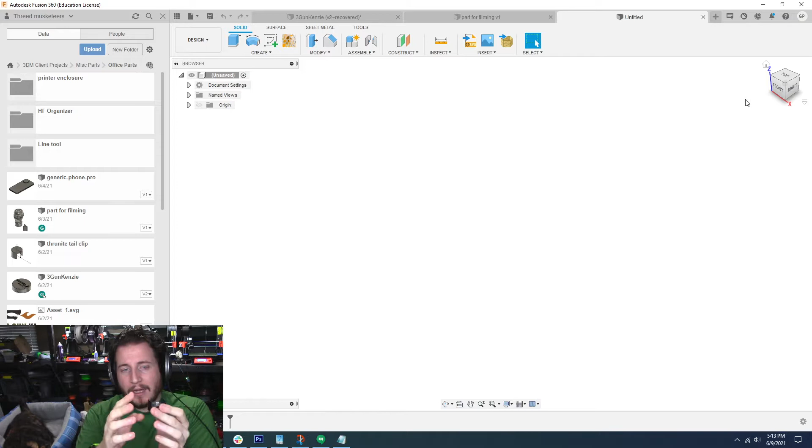All right, we're in Fusion. As always, we're gonna start. This piece is gonna be better from the top because I'm gonna extrude straight up. And what we're gonna do is we're going to create a piece that this can slide into, okay? So it's going to have to grab it down at the bottom and then reasonably follow this contour. So as it goes in, it can really only go in one way. And then we will be able to screw it into a 1/4-20 thread mount.

1/4-20, that's 1/4 inch, 20 threads per inch. There you go. We're gonna try out two different methods for this. I'm gonna actually create threads in this part. I don't know if that's how we're gonna end up doing it because of course plastic threads are nowhere near as strong as metal threads. So we may end up going to a heat set threaded insert, but that'll be a channel video if and when that does happen. So let's start with it.

Let's grab our sketch. Let's scroll to the top. Let's get our diameter. We're going to measure it. So we talked about draft in that last video. You guys can see the draft on that. You see the angle? That's draft. And so when you want to measure something with a draft on it, you got to get all the way to that outer edge.

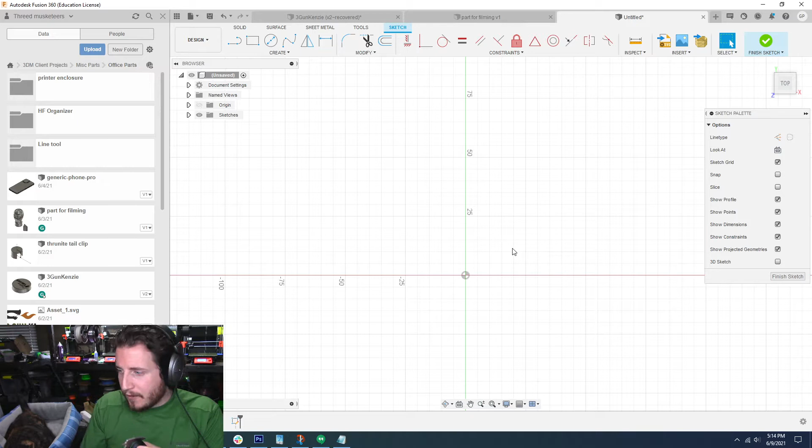39.5. We're going to call it 39.5. I'm going to up it to 39.75 to give us just a little bit of room. And I'm going to show you what I'm going to do. I'm going to make the walls relatively thin and add a little detent. So let's go ahead and get our design on there.

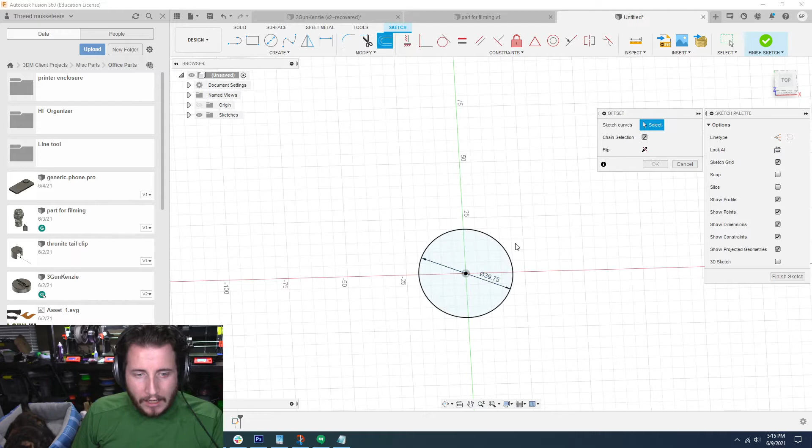39.75. That is the base. So this is the base of our unit. We want to have it be a little bit bigger than that. So to do that, we hit O for offset. So I'm going to go 2.5 millimeters on that. Gives us a good base there.

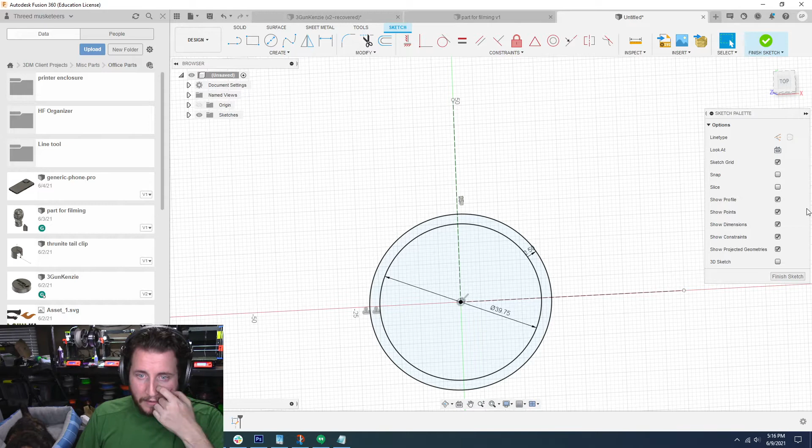And so I want to add some lines. But to do that, we need to first do the lines that we always want, which is L and X, our construction lines, to come up. Get it way out of the way, hit escape, hit the L key again. Go out to there, randomly hit X, hit escape, and that way you are no longer in your construction.

We want to create something so it slides and clips in. There are a few different ways we can do it. But the way I'm thinking, I want to do a line from there. I don't know, man, maybe there. And we're going to end up mirroring it, so let's look at doing some lines here. So I want this to be, let's grab a dimension. We're going to grab that to the center point there, because we want to know, are you not going to give me an angle? Seriously? All right, fine. We'll do it from here to this top.

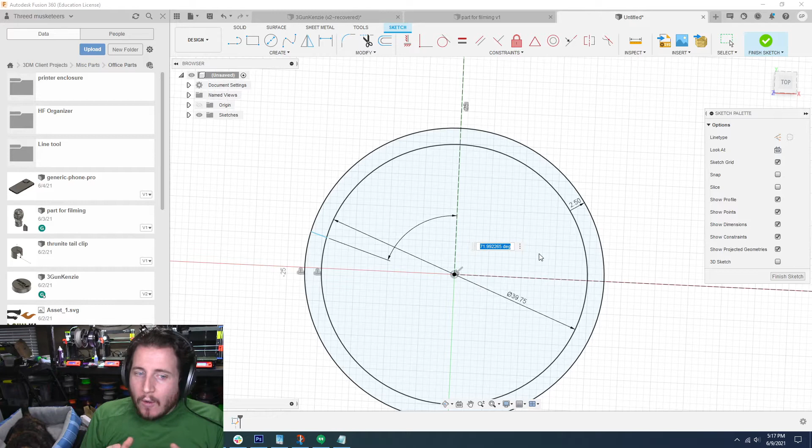Okay, so at 90 degrees, that would be a perfect half moon, but we want to go a little bit further. That way it'll lock in when we put it inside. We don't want to go too much. Okay, so if we go to 90, you don't let me change that? Oh, no, it won't, because it thinks that it is over constrained, so we got to redo that constraint. That is 90. I want to make it 70. And that's going to really force you to push it in. That might actually be a little bit too much. Let's do 75. That should be good. That should be a C that really grabs it in.

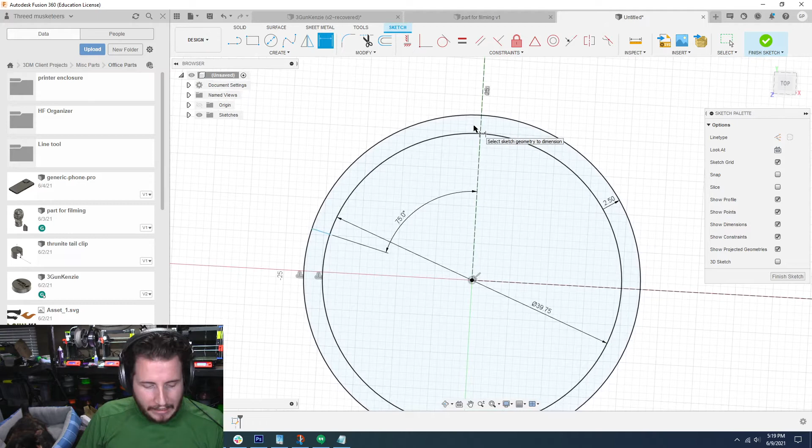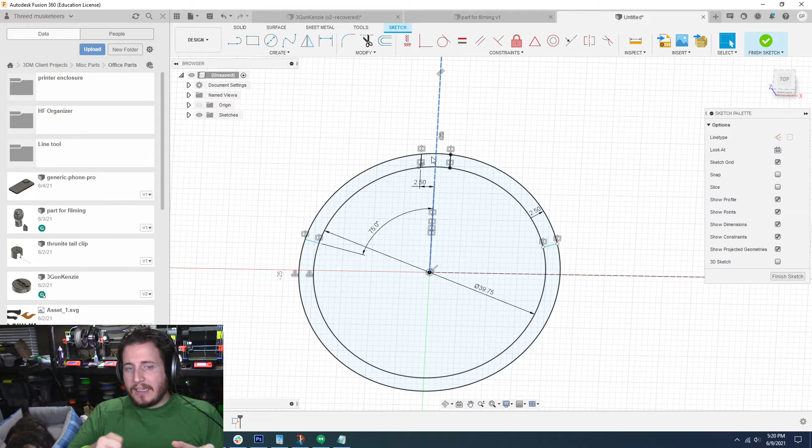On this side here, we're going to do a couple of lines. So let me grab my line tool. I'm going to come straight down. That should be okay. We're going to go with a mirror here and here. Mirror line is that. We're going to click OK. And the reason we're doing this is I want to create a little nib, so that when you slide everything in, it kind of locks in place on the backside as well. So you have to bend it out and then you can slide it.

All right, let's first get ourselves a good looking base here, because as Meghan Trainor says, we are all about that base. I'll just do everything with a factor of 2.5. Actually, I don't know if we want to do that.

So we have to design it for the fact that we're going to have a heat set threaded insert in there. These are those inserts. Now, those inserts are 6 millimeters in diameter and 8 millimeters in length. Okay, 6 millimeters tall, 8 millimeters OD. Now, here's the deal. Threaded inserts can be a real pain in the ass, but that does mean that this needs to be at least 6 millimeters deep and likely should be probably 8.5. So, oops, went the wrong way. Minus 8.5. Gonna bring that sketch back because that sketch matters. I gotta go back into the sketch and make a few other changes.

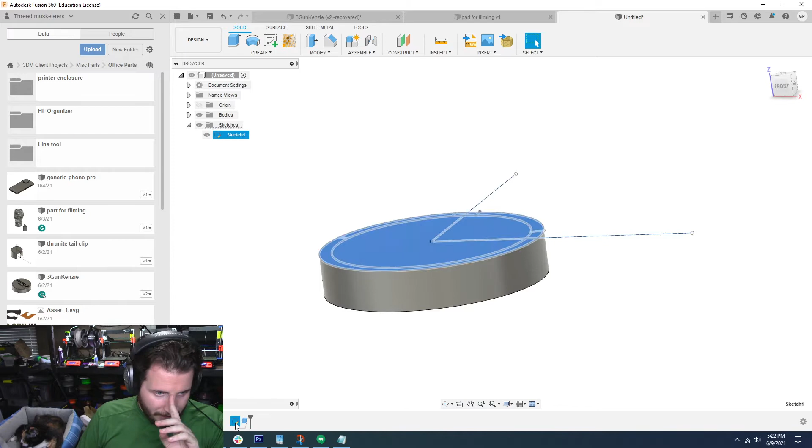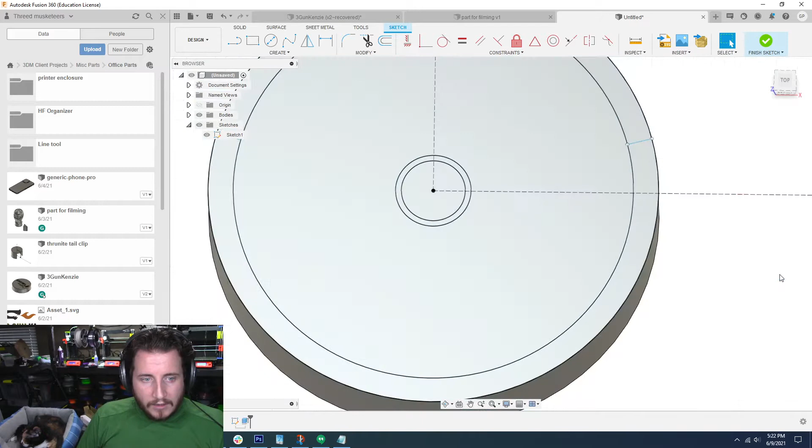So, let's do a circle. We're gonna do this to 0.25 inches. And we're going to do another circle to just under 8 millimeters. So like 7.5 millimeters. That one's going to be fun. All right, so we're going to finish the sketch. We are going to also do, not a press pull, we're going to do E for extrude. Where'd you go? Right, you're over here, you dingus.

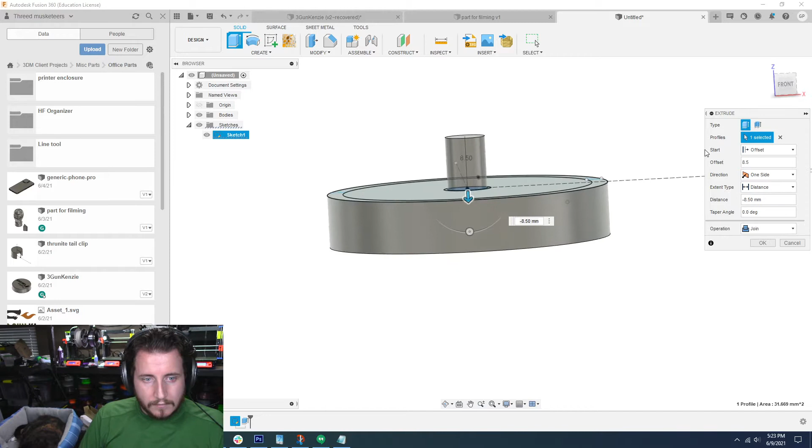This is the hole that we're going to be using, but I want it to be an offset plane. We're going to offset it by 8.5 millimeters. And it's going to be negative 8.5. And we're going to have it go in probably positive 6.25. Give you a little bit of extra just in case. Okay. And we're going to immediately thread this so that I don't forget.

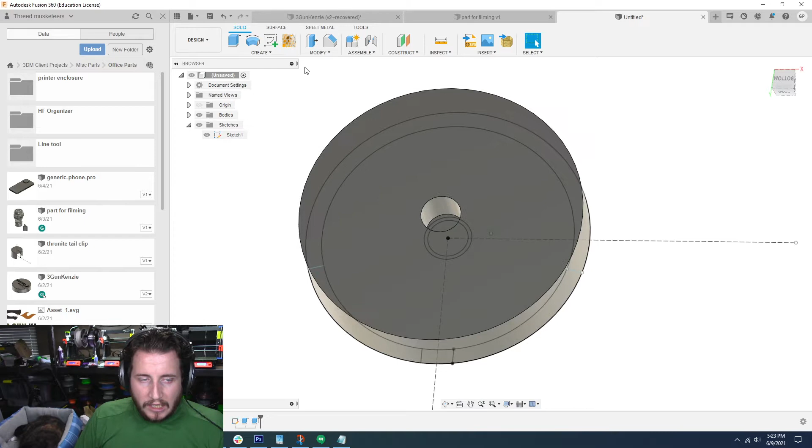But here's the problem with Fusion and a lot of programs. Chamfer your hole first. When you're dealing with threads, you want your threads to be chamfered. Chamfering threads matters a lot. So we're going to chamfer this like a millimeter. Something relatively large. And that should work. Now, if we end up having to do the threaded insert, we're probably just going to have to drill this out completely. Kind of is what it is, unfortunately. You got to work with what you got.

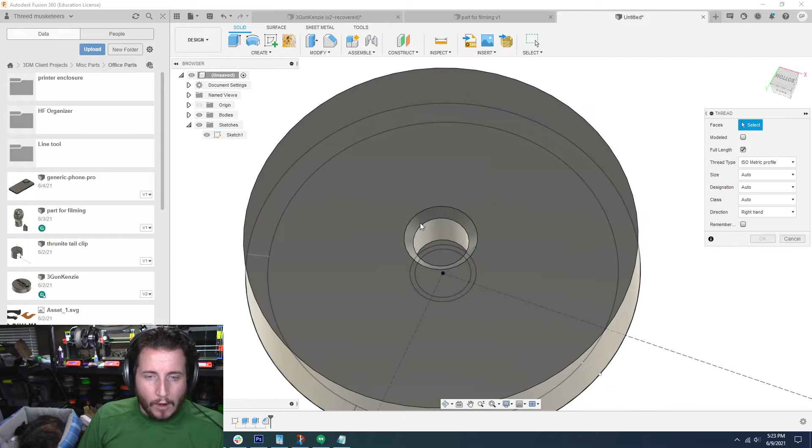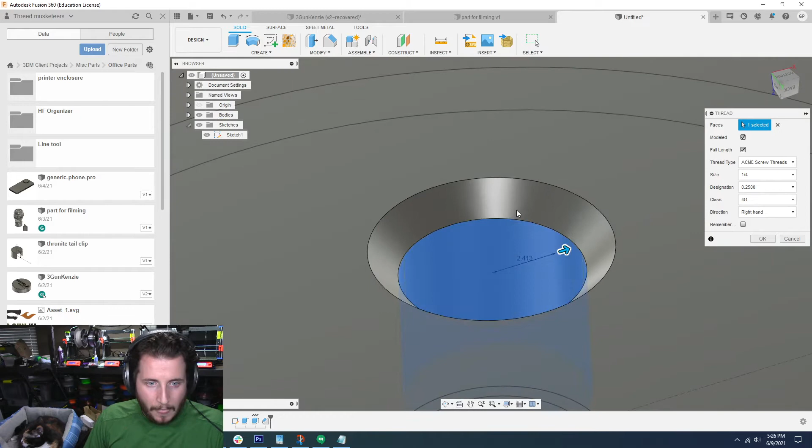So we're going to grab that. I can just cheat and pull in a 1/4-20 bolt, which I think is what I'm going to end up doing. All right, we're going to cheat. Maybe this is 1/4-20. I don't know. If it's not 1/4-20, it's going to be. That shrunk way down. Interesting. All right, let me scroll back. I'm gonna redo these threads because it looks like it's not taking with the chamfer, and that's my concern here. Yeah, see, it doesn't look right. It shouldn't be an Acme screw thread.

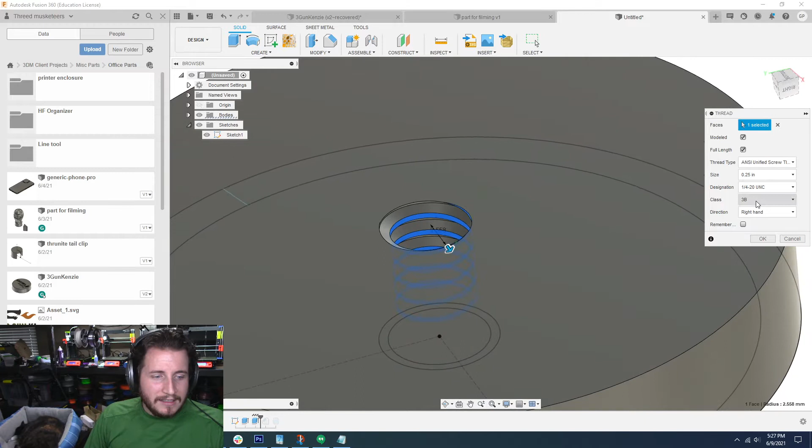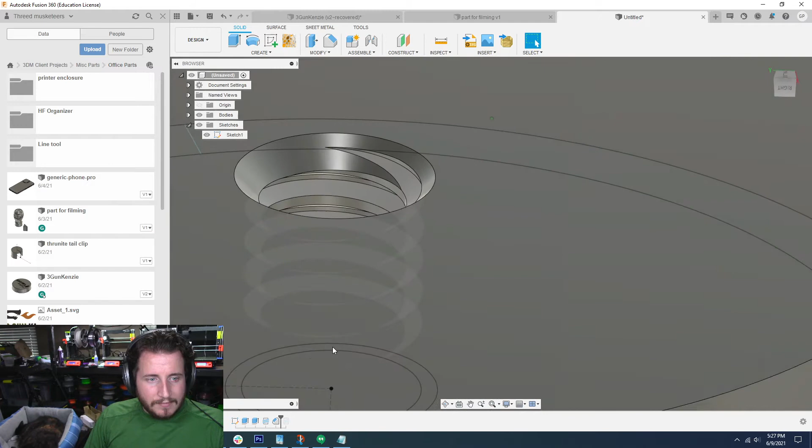So I don't know why I'm only getting... Oh, hey, found it! Yes! Golly, it's under ANSI, Unified Screw Threads. I'm going to push this out here. That did not get mad at me? No kidding. I'm going to move that there. That's not going to work. So, yeah, not amazing, but that should be quarter 20.

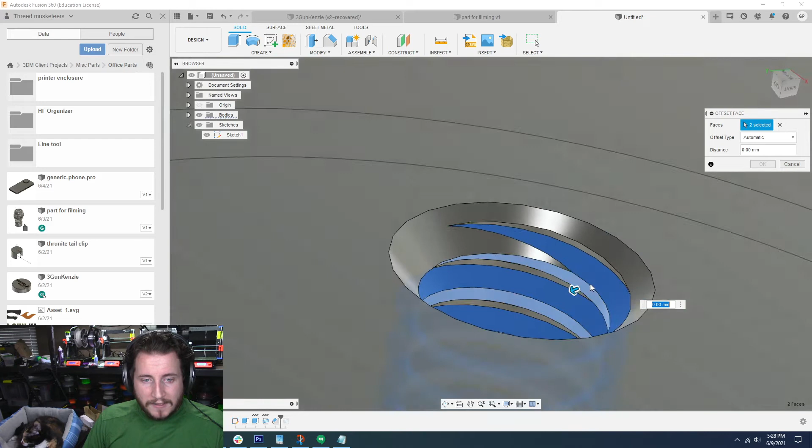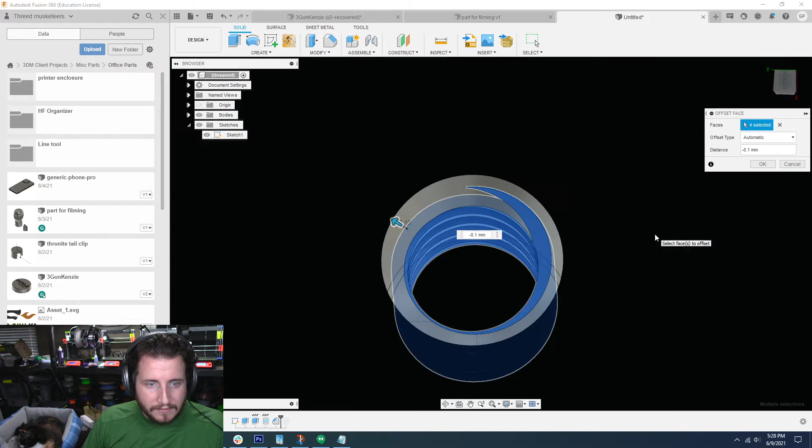But what I have learned, especially, is make sure you offset all of your faces when you're doing this kind of thing, because you are going to mess up and your printer is not going to be perfect. So I'm going to offset it by probably -0.1. And if I'm right, that should expand the threads a little bit. Yes. Okay. And that's good. That gives me a little bit of wiggle room. Actually, yeah, I'm going to give myself more wiggle room than I need, because it's going to end up screwing down flat to this plate, so I just don't care.

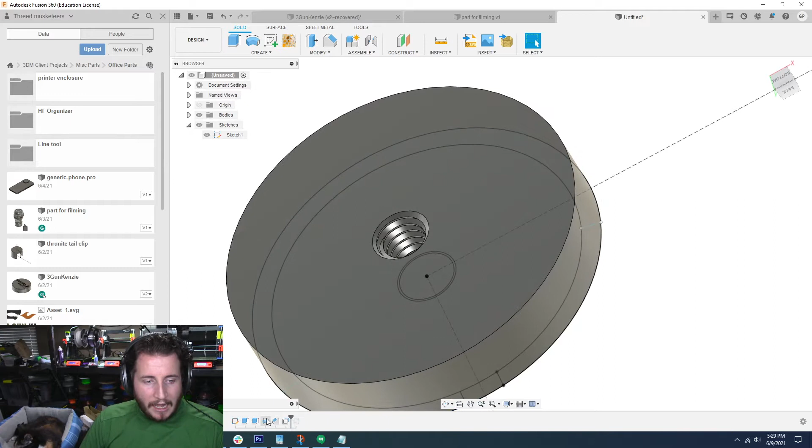All right, so we got our bottom threaded hole, and yes, we could do heat-set threaded inserts, but thankfully, because I'm not a complete and utter moron, I was able to find this. That's a joke, because I am a complete and utter moron, and I missed it for a little bit there. Either way, I'm pretty happy with that. That's going to get the job done for us.

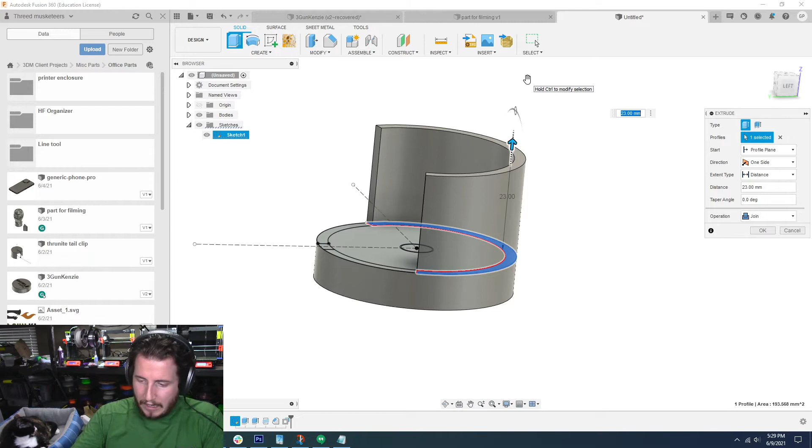Now we're going to go ahead and do our second extrude, E for extrude. We're going to bring this up. Now, if we look at the base plate for the Osmo Pocket, it is 22.6 high, and then the Osmo fits directly into it. So I'm going to do an offset plane from here at 22.75 from the top, which puts me right where I should be. I'm going to create a new sketch here.

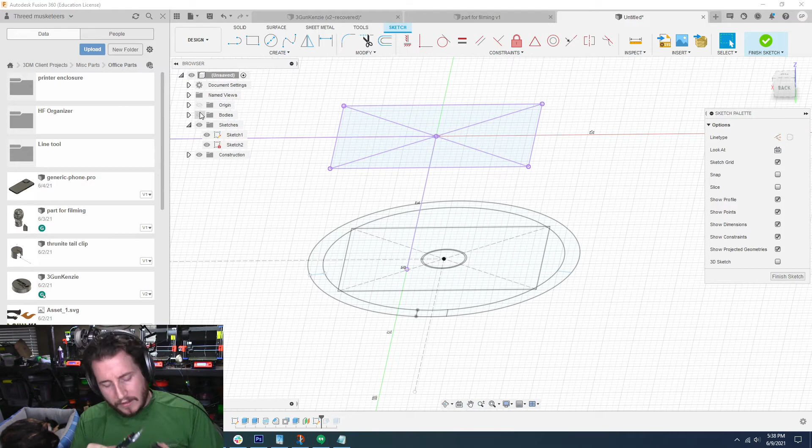I feel like I should try to model their piece first and then look at building a mount for it. So I think that's maybe what I'm going to try to do first. Grab me all of my reference measurements, all of that stuff. I think that's all I'm going to need further up. Bring the body back in, but honestly, that body's just going to cause us problems. So we're going to take some basic measurements and actually build this piece the way that they would have built it. Okay, so we're about 8.3 millimeters up from the bottom here.

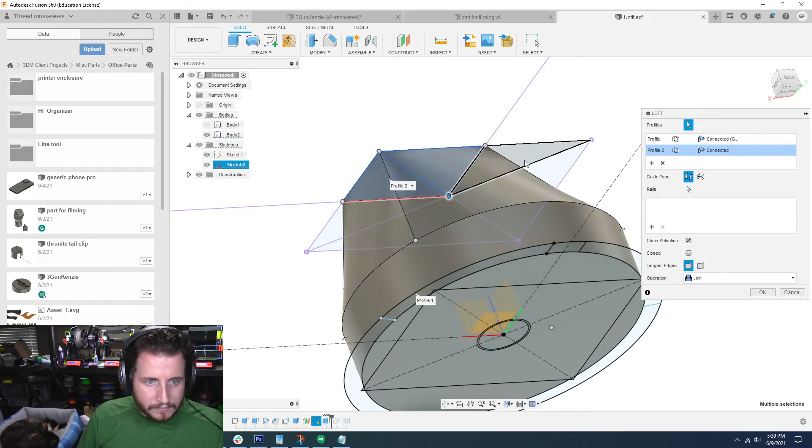Then it looks like it's lofting. So that's what I'm going to do. I'm going to loft, not revolve. I'm going to loft between this profile and, dang, it's not... Okay, it's going to let me do it this way. Oh, boy. Oh, it's so mad. It's all self-intersecting. Okay, there we go. Is that really? Honestly, that's not that bad.

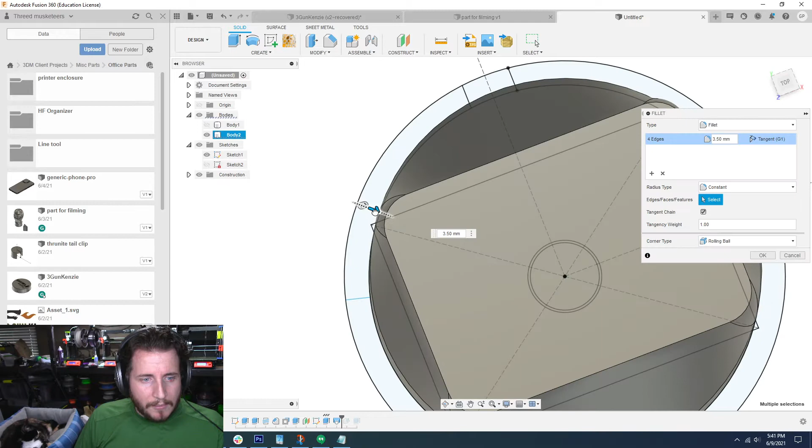Yeah, could be better. So I probably want... It has a very, very light fillet to it. I mean, even that might be enough. I'm going to say it's at least 3.5 millimeters. That's got a good fillet on there. That kind of gives us the idea of what it looks like. I'm going to turn back on Sketch 2. I'm going to go back into Sketch 2 as well, because I can actually measure the thickness of this.

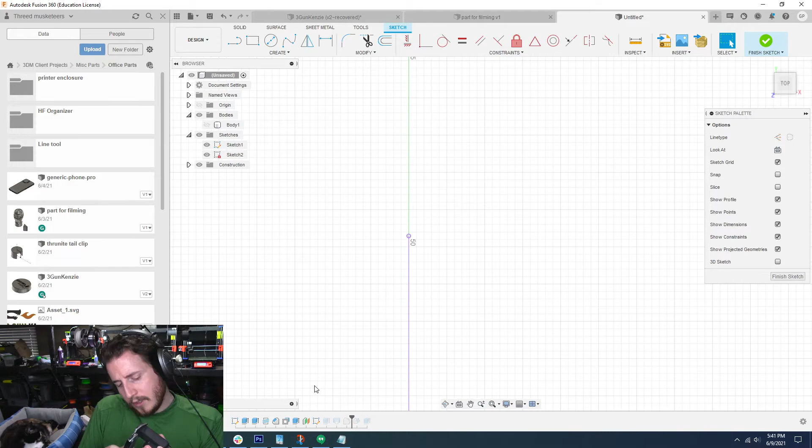The Osmo Pocket is 28.66 by, at its widest, 22.83. All right, let me make another center rectangle on that, and let's see where that brings us. Nope, didn't click the center. So rectangle, center rectangle. Let me grab from the center there. Our width is, it's a consistent width on this thing, so just measure it with your calipers. 28.6 will go to... I don't know. Nah, 28.6 is fine.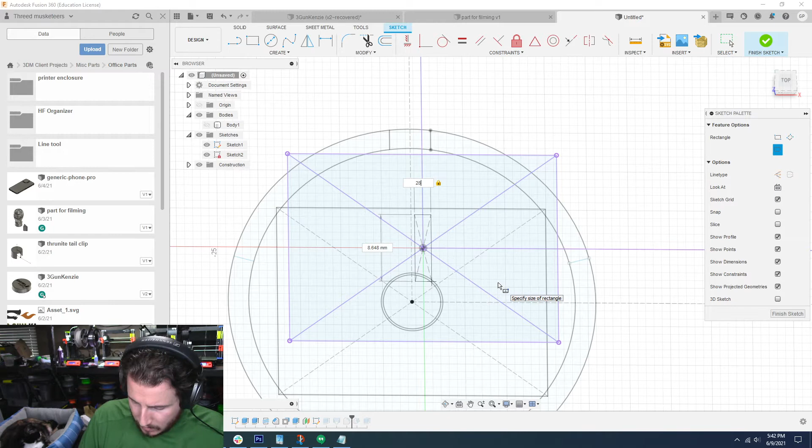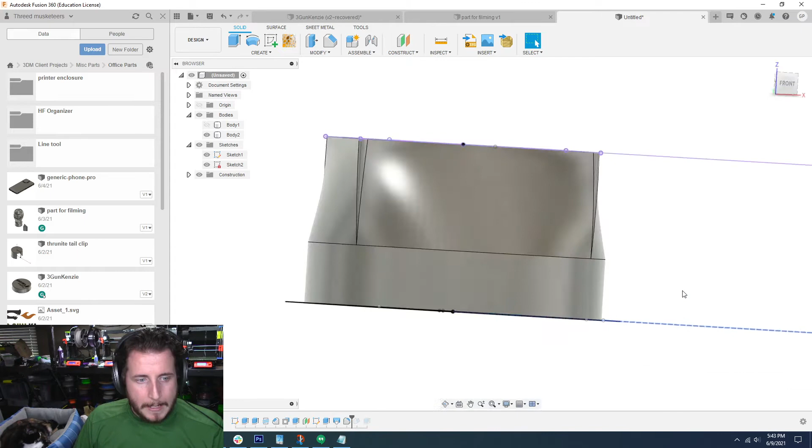28.65 by, and so if we look at its profile, it does have a bow, so we want to find it where it's reasonably at its thickest, measured there, and that is 22.85. This should give us a reasonable idea of how they drafted everything in and how they built it. So, that does not help me one bit. I know for a fact that these are gone in it, and they're just turned into big fillets, so let's do something. When we did this loft, I'm going to make it a new body, because that's going to be important. I can turn off the loft.

I need to create a sketch there. Or actually, no, I don't need to create the sketch. We can come to here. We have the loft on, and we are going to extrude. Sides aren't flat. Okay, we're going to extrude this and this. We're going to do an offset. Again, I believe that's 8.3 is what it was. And we're going to extrude up like 200 just to go through everything. So we'll do an offset of 8.3 and a distance of, I'm just going to do 50 so it's not that crazy.

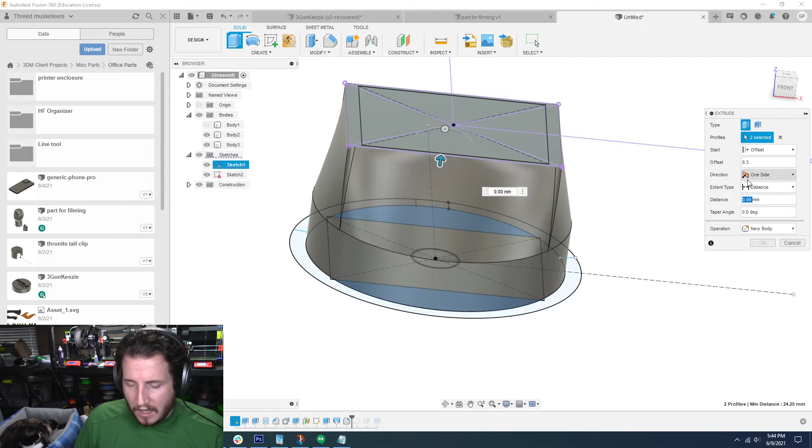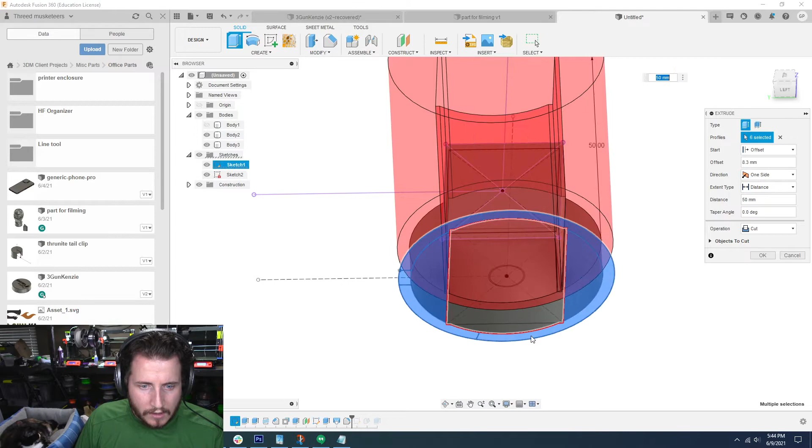I think that should cover it. Now, I'm going to be on the safe side. I'm also going to add some of these outside ones in so it cleans up that outside edge. Nope. Yeah. So that way it cleans up that outside edge for us, because there was a little bit of overhang. So we have that. Boy, that's some weird intersections. But that is honestly exactly how it looks.

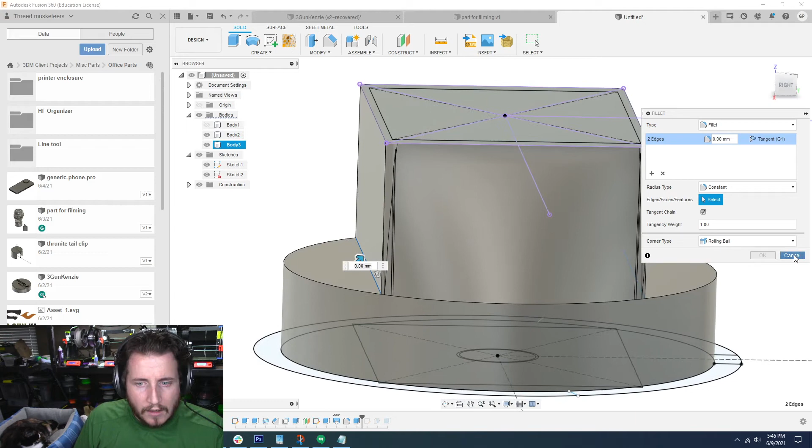And they just filleted the crap out of this. So they have a fillet here and a fillet here that appears to be a reasonably smooth fillet. So, right, we now need to combine these two. So we can do modify, combine this, and sure, we're going to join them. Now we can do our fillets. And the reason I knew they weren't joined is the arrows were going in the wrong way. I'm like, oh, that arrow's not going in the right direction. So I knew to go ahead and fillet together.

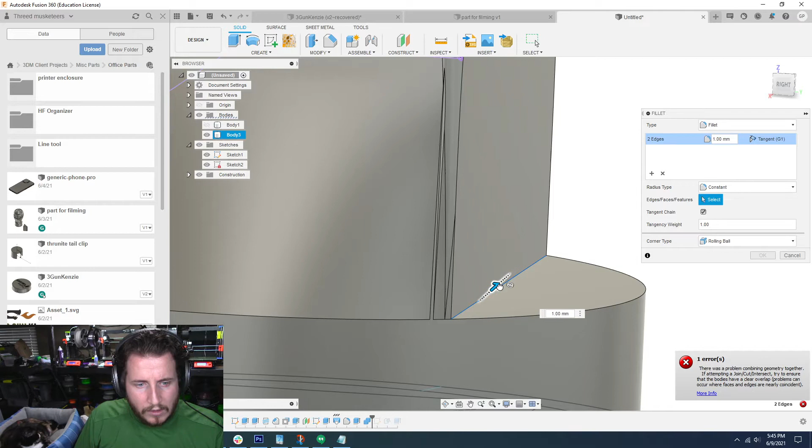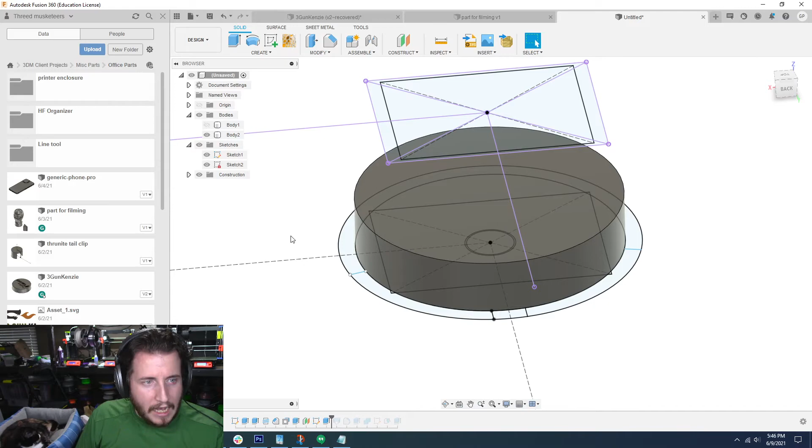Ooh, you don't like that. And that is because of that fillet. So I'm going to come in here. This fillet is making everything else mad. So I'm going to suppress it right now. I've got a better idea. Let me roll back. I'm going to roll back to here because I need to do a new sketch. I need to do it here because I want it to loft only a part of the circle. And I think that's my issue right now, is I'm lofting too much.

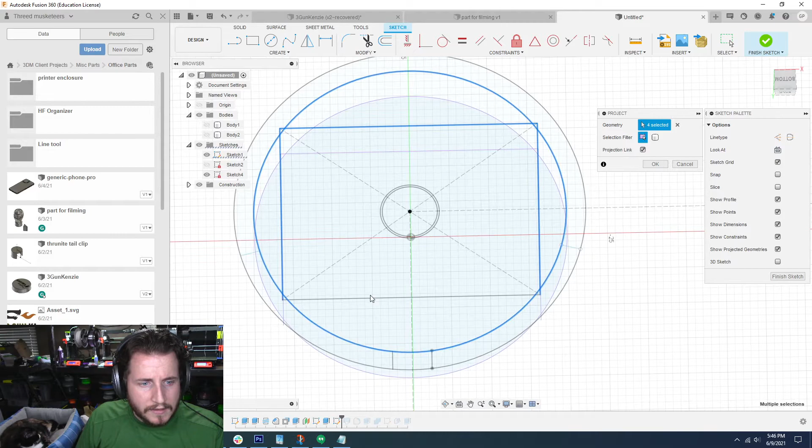So I'm going to turn off this body so it's out of my way. I'm going to turn off sketch 2 so it's out of my way. So I want to project this, that, this, and that. I think that's all I need to project. We're going to turn the body back on. Now we do the loft. I'm going to redo this first profile, and I'm going to say that I want it to loft here, here, and here into that. And I think, theoretically, that's going to get me what I'm looking for. Yeah, I think that's going to do it.

We're going to join it this time because I don't think the rest of that stuff actually matters at this point. I'm going to add a fillet here and here to give me the fillet style that they use. This is why DJI products are so damn expensive. It's because they put so much friggin' effort into these stupid little things.

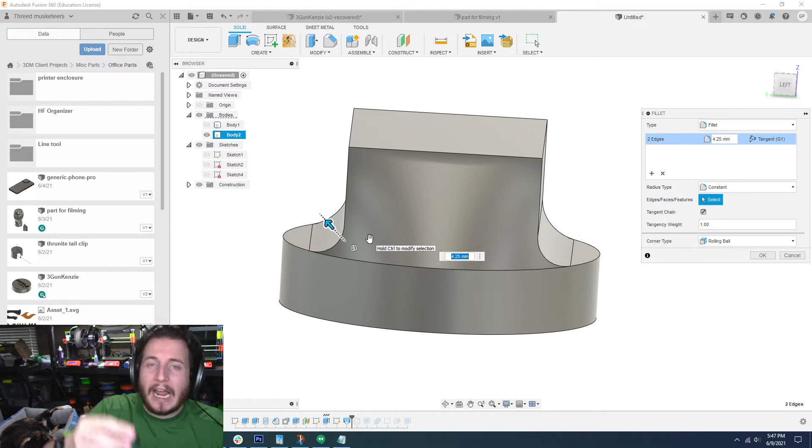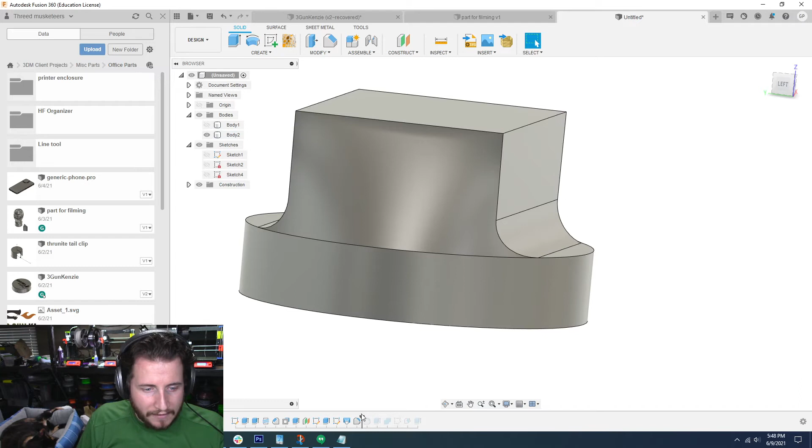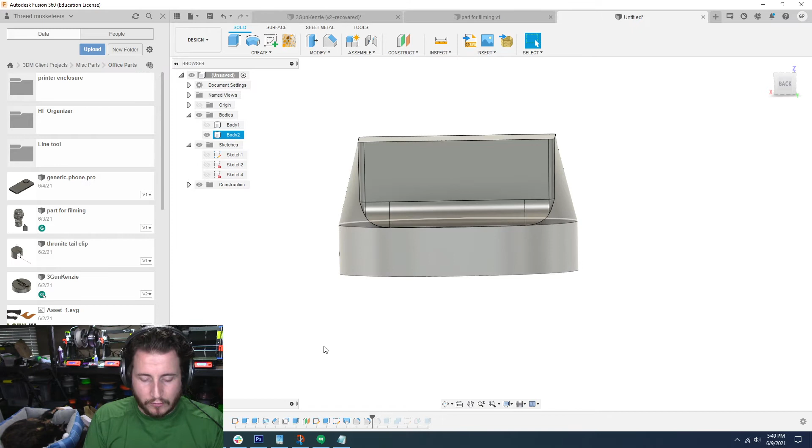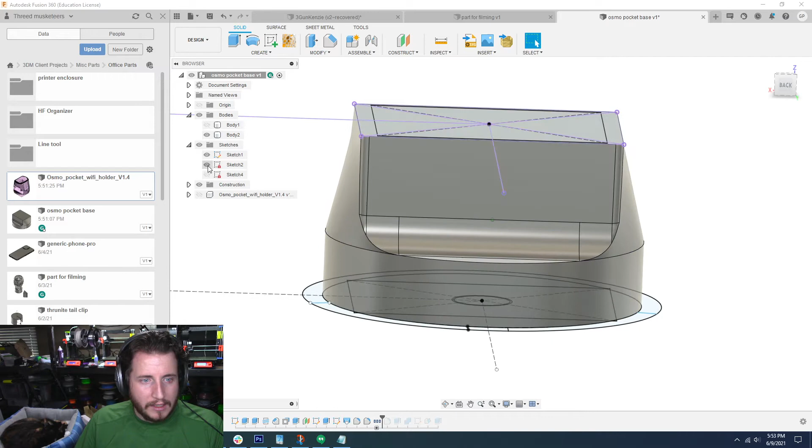Other than the fact that this whole thing is drafted and angled, I think that's right. I think I know how to fix this. This draft, man, this part is tough to design. Yeah, see, it comes up. I think I know how to deal with this draft. I think it's another loft, and it's going to require me to have both of those open. So let's create a loft and see what happens.

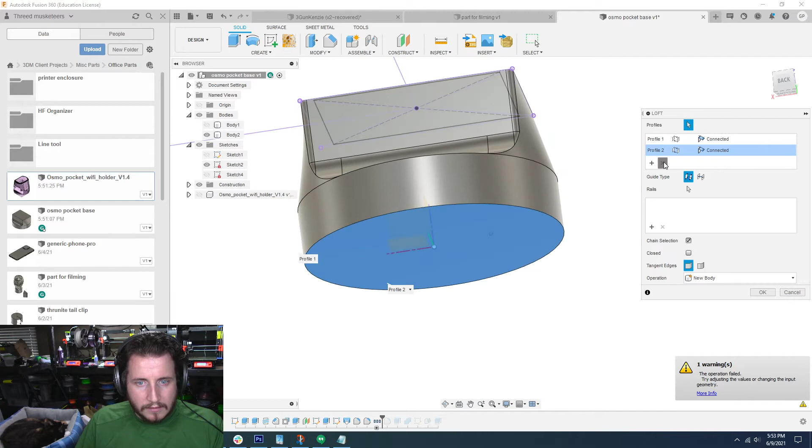We're going to come from this bottom side here. Okay. Probably could have just unclicked that. Alright. That's profile 1. Profile 2 is going to be this exterior. If I'm right, I want it to intersect. I didn't expect that it was going to be non-uniformly drafted, but it clearly is, because this is basically dead flat and this is not.

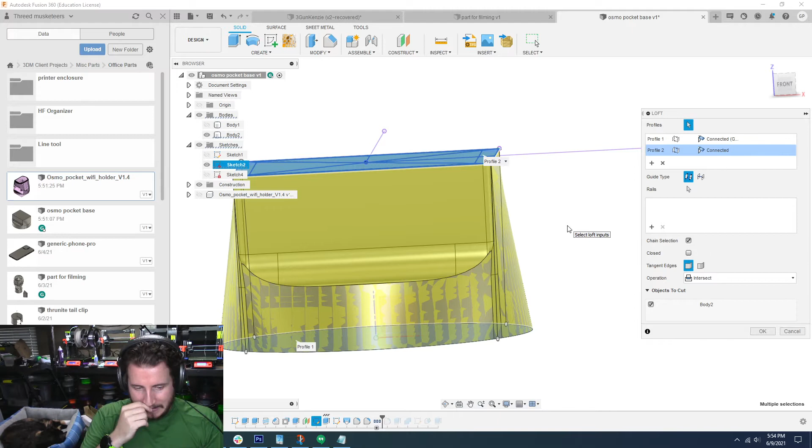Now, I could just ignore it, which part of me says to just freaking ignore it. Your part is still going to hold it in, and we can do what they did and hold it in on these sides, which is what I'm going to do. Whoever designed that Thingiverse thing made the right decision. Holding it on this side here, on all of this, is way easier. Because all you have to do is just get it, it's a slide plate, right? It just needs to slide in.

Alright. Oh, I feel like an idiot for not thinking of this. We're gonna do a slide plate mount. This body, gone. Literally keeping it is going to bother me, so I'm gonna kill it. Okay, we're gonna turn off that sketch. Let's see. We want to do...

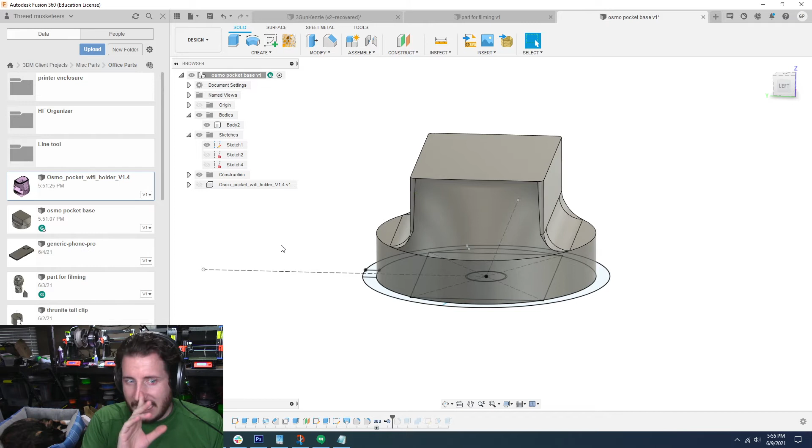See, this is what CAD's all about, right? It's about being able to look at it and say, what is really the best way to do it? My way was going to captively hold it and then have my USB-C port really easy to access.

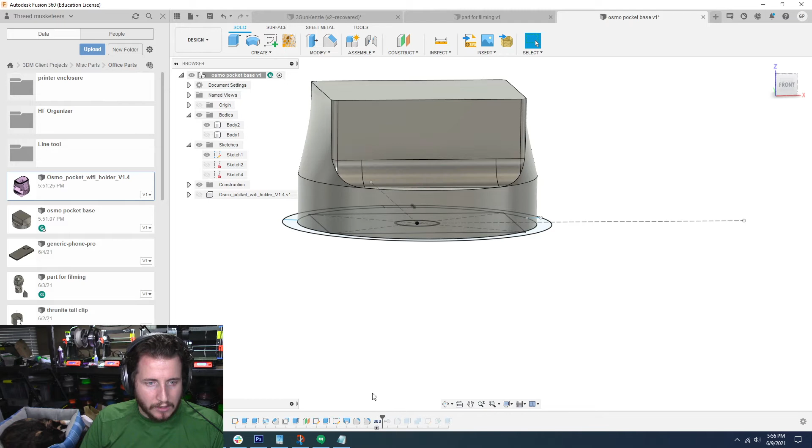This time, I'm going to do similar to what these guys did. All right, so let's go ahead and remake the base. So the base... No, what? Grant, don't get rid of that. That base was still good. Getting rid of it would get rid of all of that threading that you did.

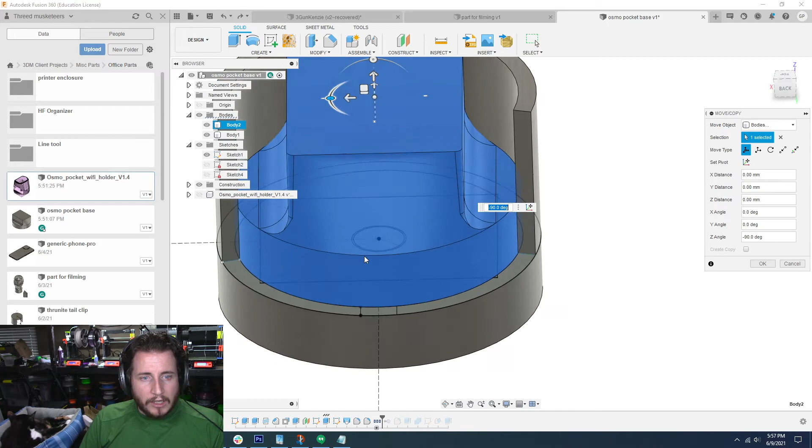So we're going to take body 2 and we're actually going to move it, and all we're going to do is rotate it. We would like to try to move it to a better location. All right, I'm going to rotate this thing 90 degrees because we're going to create something that kind of slides in and grabs.

All right, so now we can look at creating something. Where's this extrude? This extrude's right here. Or we only got to come up like... probably 12 is all that we need to come up. Yeah, 12 is good. All right, so we're going to create a sketch.

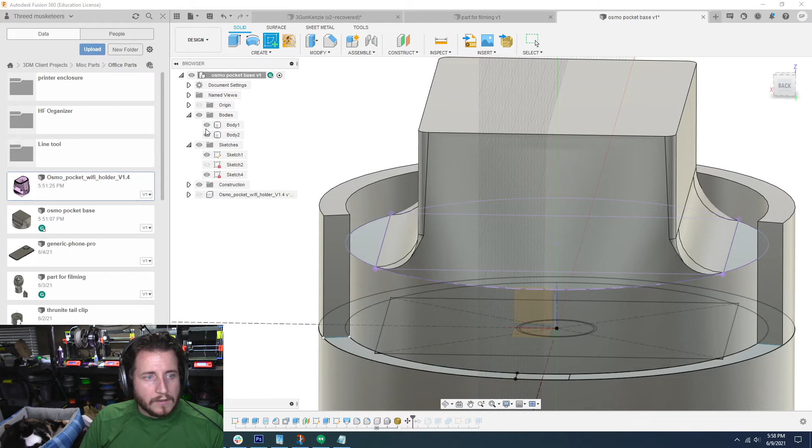We're going to create it... actually, I think we already have a sketch there. Yeah, sketch 4 is already there. All right, so we can turn off body 2, keep sketch 4 on, except that's where everything is.

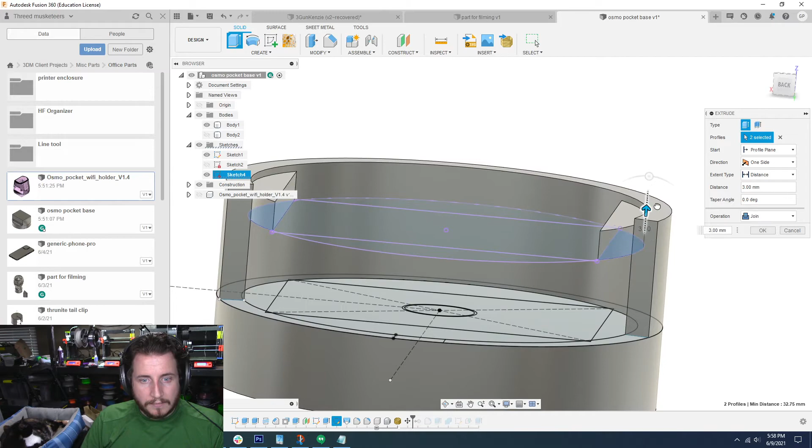Invariably, we know that that space is clean. So we can come in, get rid of body 2. We can hit the extrude key. We can literally click up to there. That should be fine.

I'm going to fix that. Don't worry. Yeah, that, honestly, it's actually going to hold it in just fine. Wow. All right. Hey, whatever.

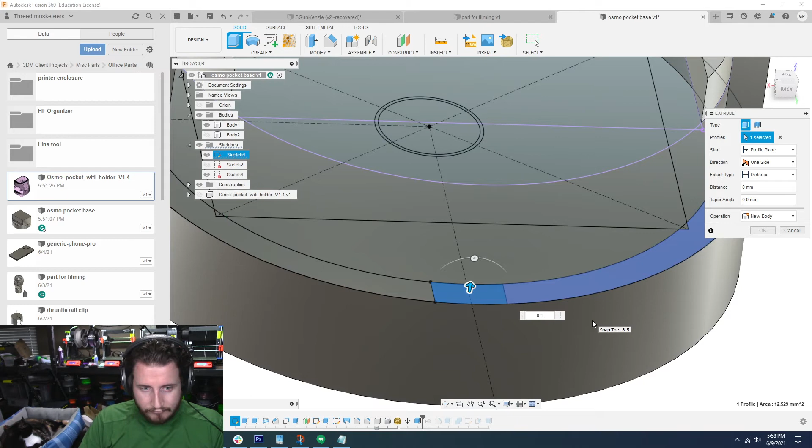Now we're going to come to here. We're going to bring this up like... no, more than that. Probably just 1 millimeter, and we are going to fillet the ever-loving hell out of this thing so that it is just like a little bump. Just a little bump.

Which reminds me of a buddy of mine whose name is, well, he goes by Bump. His real name's not Bump. His name is Josh. Oh, you're not gonna let me do that, are you?

All right, how much can we get out of this before it starts to get mad at me? All right, so there, once it slides in, that's going to lock it in place. We've got the arms and wings there that are going to hold it.

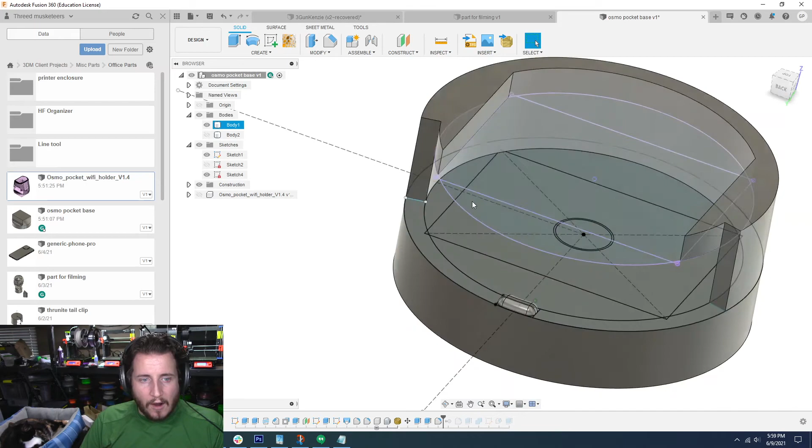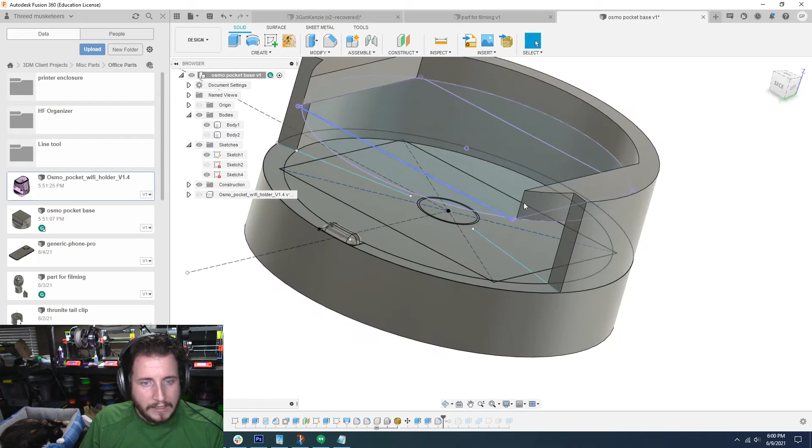We're going to come back to sketch 1 because I can see something that we can actually fix, which is dealing with this. Should be extended all the way out. We're going to mirror that over the mirror line. Okay, and when we did this, that extrude, we'll do another extrude here and here.

Get this the hell out of my shop. All right, now we're gonna fillet the crap out of it, and honestly, this should be all that we need to do it. I'm gonna do some more fillets here, just because it's gonna bother me if I don't.

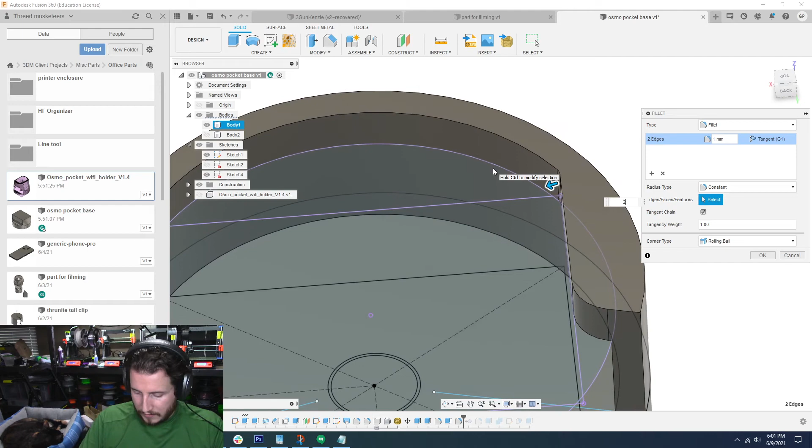Let's do a 2mm fillet. That's fine. Theoretically, that should work. He says with no confidence whatsoever, that should work.

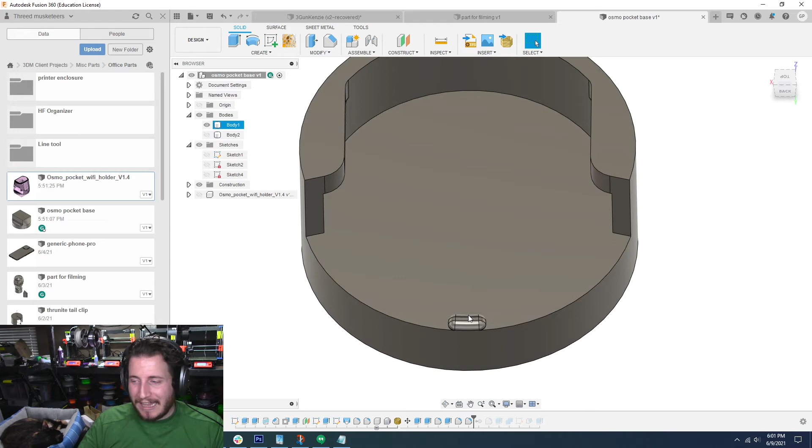Oh, man. This should allow us to kind of push it in and let it slide, drop down. I can't fillet any of that. I can fillet this, but I don't think it's going to matter. I'm going to fillet this entire top edge.

That might be a little bit much. I'll just fillet all of these. I want it to feel good. I want it to feel good, man.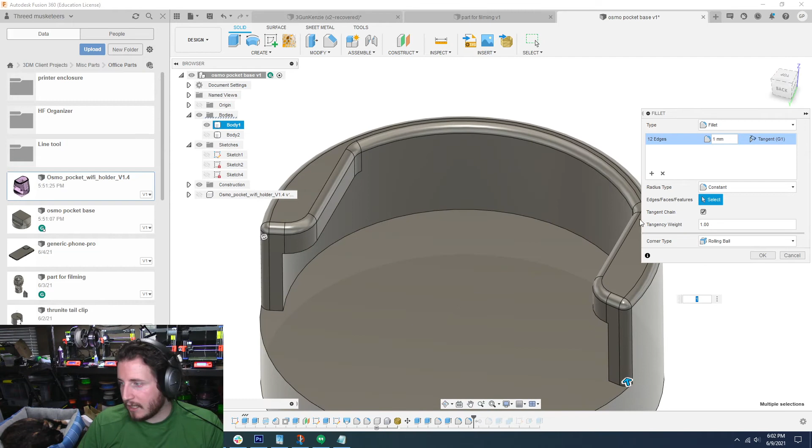So let's take a look. What else can I do? I'm gonna chamfer this bottom edge a little bit. Yeah, I gotta have my USB-C port. Totally forgot to do that.

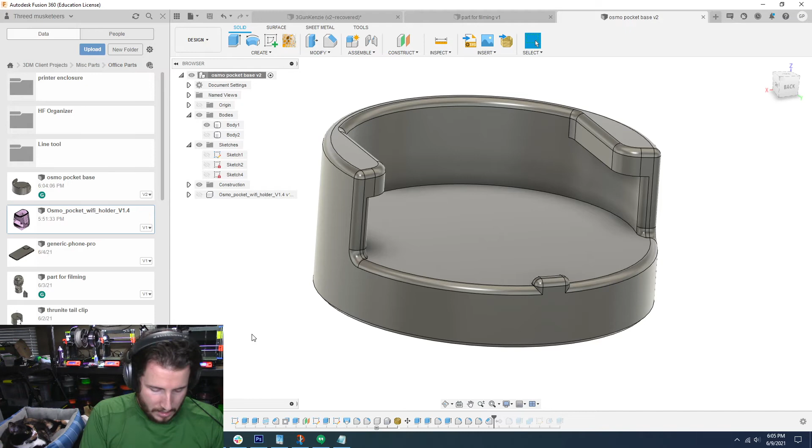Which, I'm gonna put the Osmo in here, and let's see. So the USB-C port's on the back, so if I want the Osmo, it'll slide in. I'd rather it slide in like that than like that. Yep, that just feels better to me, so I'm going to edit this side and enable that USB-C port.

The USB-C port is right in the middle, so we are going to create a sketch here, and honestly, that sketch should get moved all the way to here, where the part hasn't been filleted yet, because the fillets just add a bunch of complication that if you don't have to deal with it, you don't want to deal with it. All right, I'm going to measure.

You don't just have to measure the USB-C port. You really have to take a measurement of cat. I love you, but I am busy.

We got to add a USB-C port. The USB-C port on these bases is not in the middle as you would expect. I'm going to try to get that on the camera there. It is...

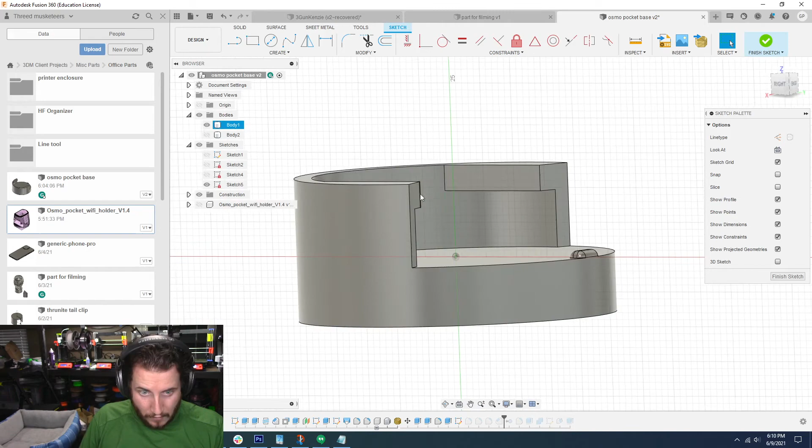That's 8.3 tall, but how far is it from the top edge? It's 1.34 millimeters from the top, so it'll be from there. I want to make sure I can project this line. I'll project the whole thing down, 1.34 millimeters.

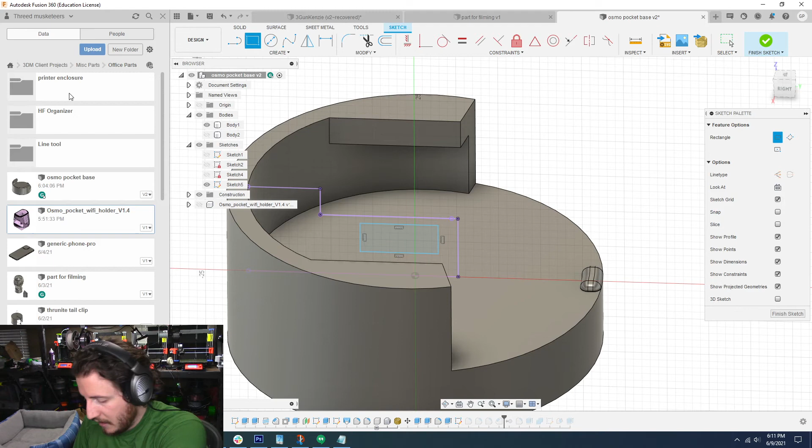I'm going to create a rectangle because USB-C is a pretty big connector. I've got a USB-C cable here that I'm going to measure, and I'm going to make the hole big enough to fit this and more. This is 6.5 by 12.5, so let's dimension this out to 6.5 by 12.5.

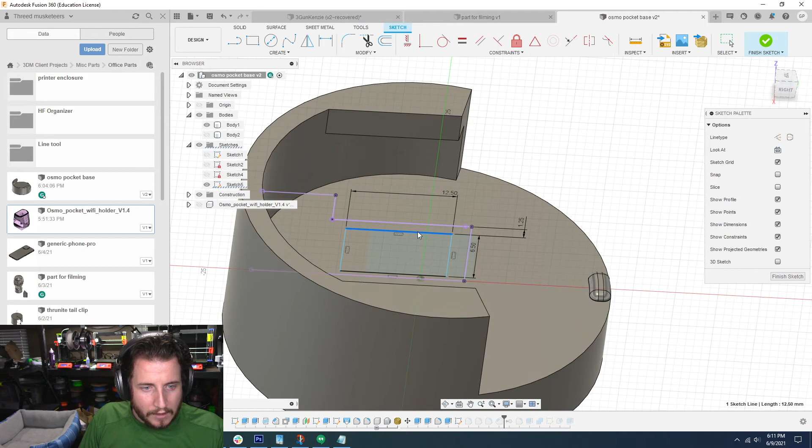So this should be 12.5, and this should be 6.5. And we need this to be about 1.25 millimeters from the top there. Now we need to take this and move it over because it's based dead center, just like that.

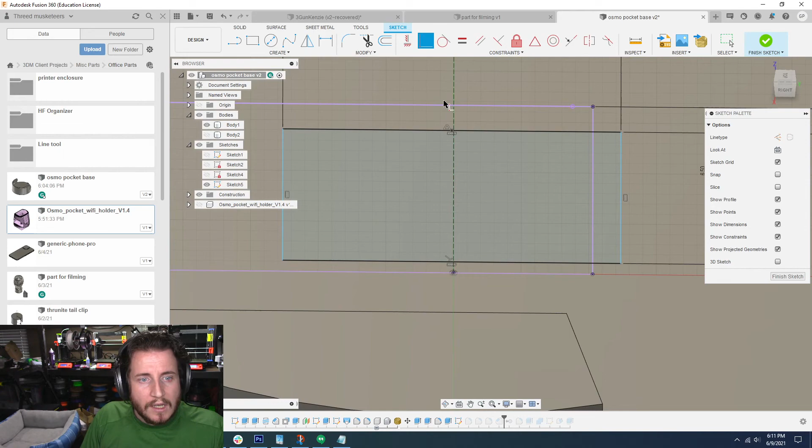Let's make sure we draw our construction line from that origin point up. Let's get rid of the construction. We want to grab a point, not text. We're going to find our midpoint, which is oddly really close, and make it coincident. That should be enough for the USB port.

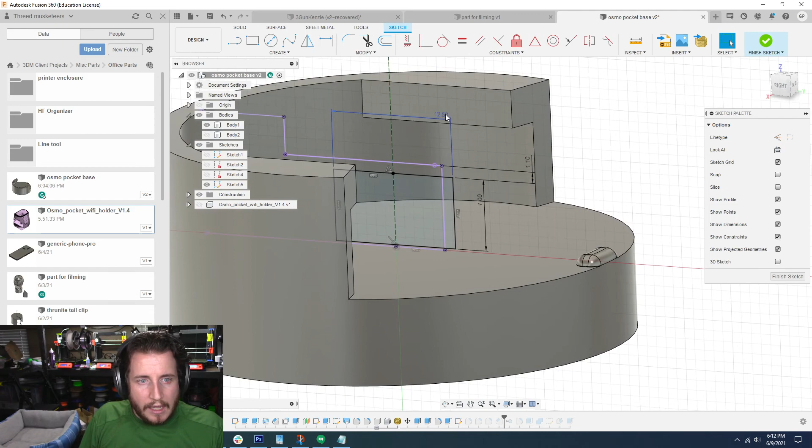However, I'm going to make it just a little bit bigger. We're going to go up to 7 - it needed to be that distance away. And I'm going to make this 1.1, I want a little bit of space on the bottom there. And 12.5, I'm going to go out to probably 13. That should give me enough space. We're going to finish that sketch.

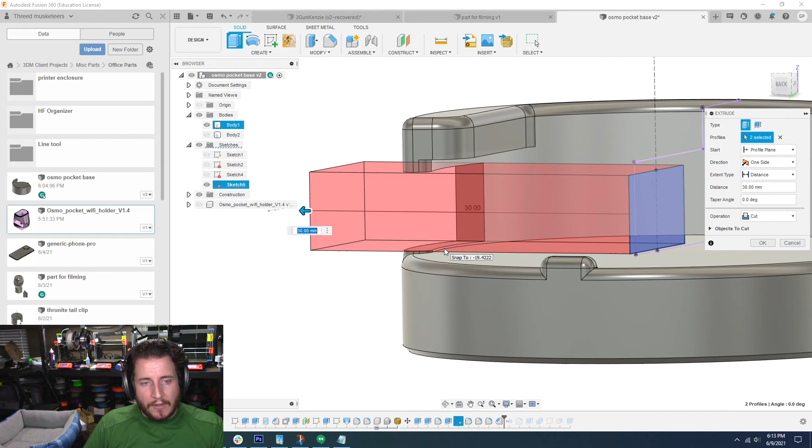Now we're going to hit extrude. We're going to extrude this all the way through - which did exactly what I did not want it to do. I've got a little wall there, which should be enough. Honestly, I can probably get away with like...

6.75. I just need it to catch on the bottom, right? If it catches on the bottom, we should be okay. The top up here just keeps it from falling out, but really a lot of that force is held by this bottom piece. So let's finish that sketch - it's going to give us a little bit more. This is okay, of course, we were going to need support in this thing anyways, so I'm not too concerned. That should cover it.

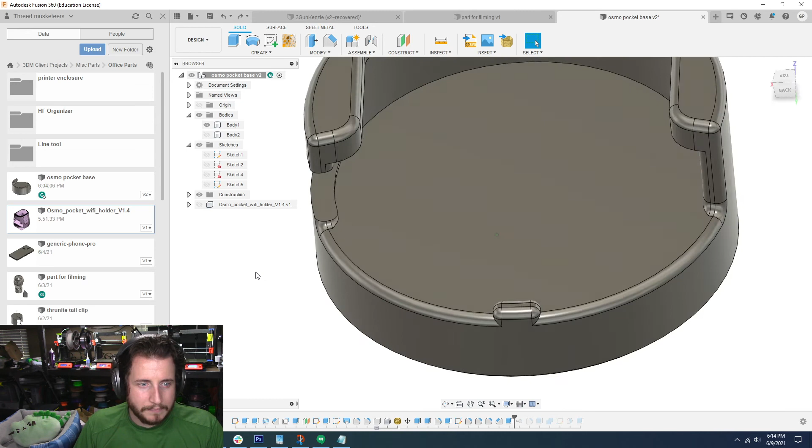This is a little bit of a weak spot, and I'm a little concerned that it might not hold it. So I'm thinking I want to delete that. No, I don't want to do that - looks better with it on. All right, we can do that.

And theoretically, I could do this on both sides, that way it can lock in either way. But I'm not going to do that - we're going to do it this way. I'm going to save it. We're going to try it out. Yeah, but yeah, there you go.

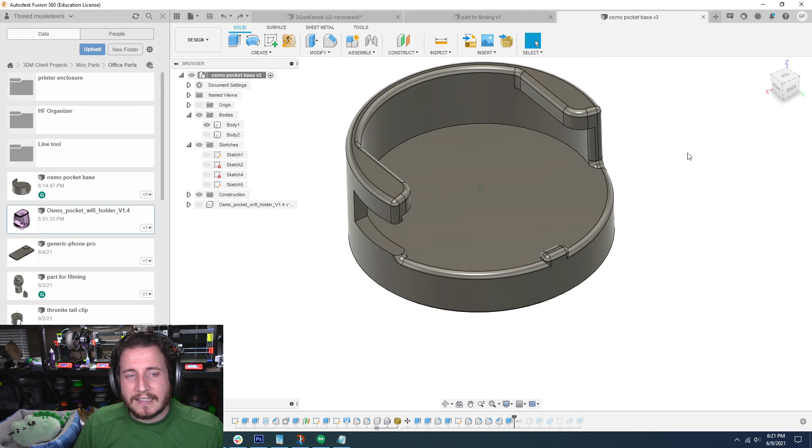There's the part. I am not... let's back up and talk about it. I'm not pleased, and I'm not pleased because I couldn't do what I was expecting that I could do, right? I had my expectations for myself set too high. And I think that's one of the best lessons from this: know what you're capable of doing and know what you're capable of designing, because you may not be capable of designing the things that you want.

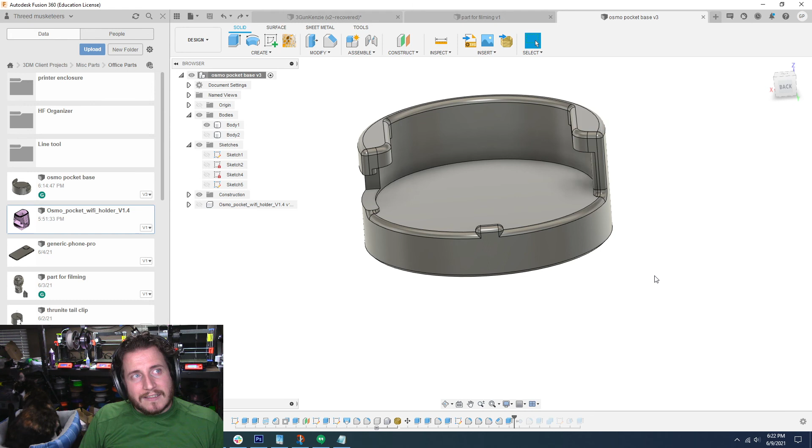And that's where companies like 3D Musketeers come in handy, because I am not normally one of the designers that makes parts - those are our staff. I guess for me, this one was, I came into it thinking I could do something that I couldn't. That's okay - I found a good way around it, and that's because of you guys, the subscribers specifically. I dig it, I think this ended up going okay. I was really risking just saying F it and being done with this, but hey, I'm glad I stuck it out. I'm glad you guys stuck it out with me as well.